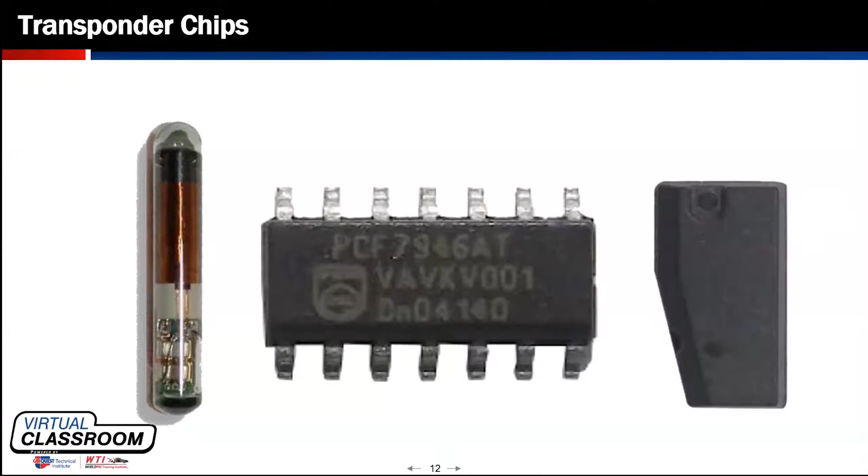So the parts of this transponder are important just in understanding how it works so we can diagnose when there's a problem later. There's an IC board on there that actually does the functions, actually will communicate. It has information that's being transferred from one side to the other. It's not just a single little chip. It's actually quite a bit of information going on there. There's an antenna that has 2 purposes, and that antenna core is integral to the antenna actually working.

So the antenna acts as a receiving device to receive a magnetic field, an actual electrical induction to charge up the IC board, because there's no battery inside of this. So when the antenna ring, which we'll talk about in a minute, actually powers that antenna coil up, it receives enough energy to actually do what it's supposed to do, whether it be yell out a serial number or communicate back and forth more than one time. There may be quite a few functions happening between the key and the antenna ring.

Well, that's all powered by the antenna coil, and then that information is pushed back out of that coil. So it both acts as a receiver to receive the energy to energize the transponder, and the antenna to boost that signal out so the receiving party, which is the antenna ring, can listen in on that. So let's talk about that part next, the antenna ring.

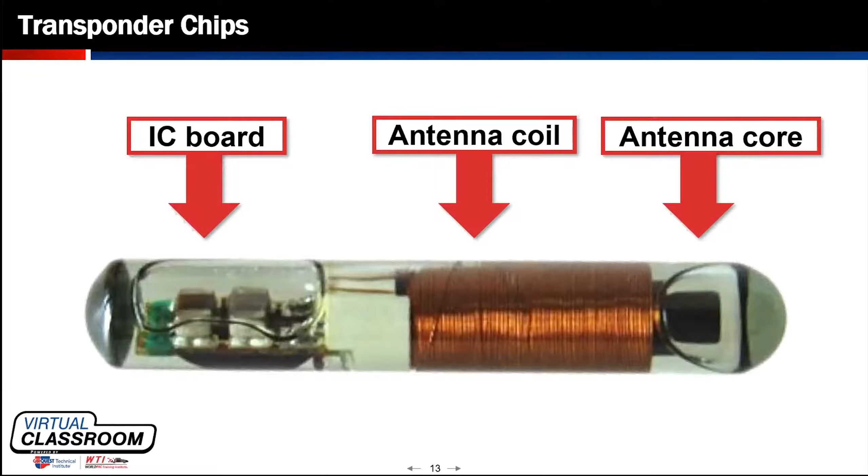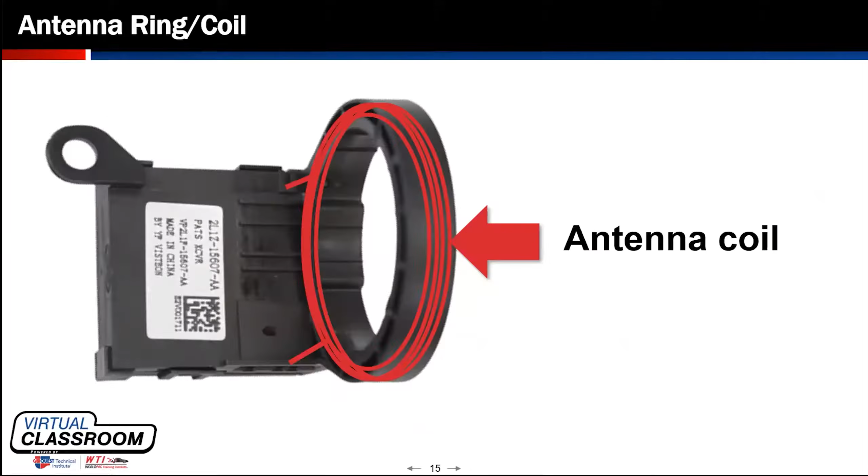There's another antenna coil there, and there's a circuit board. And that's the essentials of almost all of those antenna rings. So this IC board will act as the controller that communicates with the theft modules on the vehicle and communicates data. Sometimes it'll communicate just a, yeah, you're good to go.

Sometimes it'll send all of the key data for another module to make that decision. There's all kinds of functions that can happen in there, but essentially that IC board powers that antenna ring to send out that secondary voltage, similar to an ignition coil, to actually power that transponder that's inside the key. And then at the same time, it starts to listen in for what comes back. So all that happens very quickly.

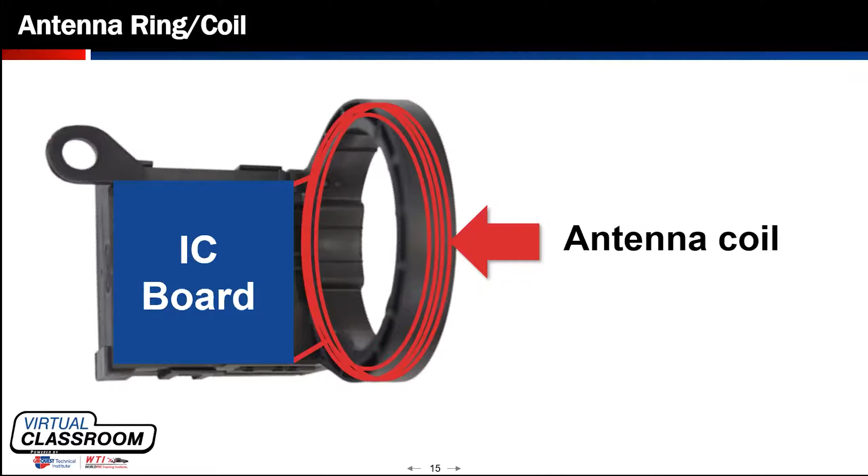I'm going to spend just a second on this one here because we're not really going to talk about this system at all for the rest of the class. It's pretty antiquated and not in a lot of vehicles anymore. I'm in the South, so we still do have quite a few of these vehicles running around. I do run into them often, but across the country, it's less likely you'll see this system at all.

So this key actually has a resistor inside of it, which is not at all like the transponder chips that we just talked about. This is a literal resistor. When the key's inserted into the lock cylinder, that resistance will be read by a separate module in the vehicle called the VTD module, and it's reading that through a pair of wires that's physically connected to the lock cylinder that's physically touching the two ends of the resistor.

As long as that resistance is the correct resistance that's programmed to the VTD module, the VTD module will send either a 30 or a 60 hertz square wave signal to the PCM. 30 hertz signal is usually on the LT1 V8 cars, and then almost every other car uses a 60 hertz square wave signal. And it's transmitted over just a single wire to the PCM. When the PCM receives that signal, that's the okay for the theft release. So that's when you'll get your injector pulse and control and everything else.

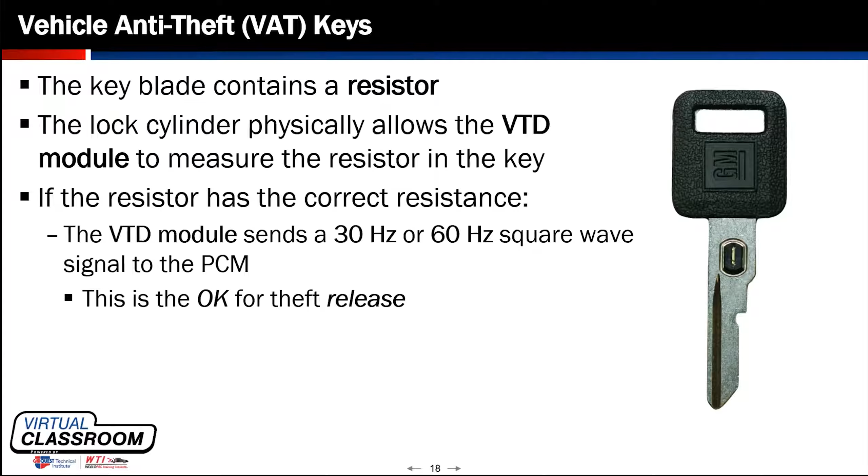And so it's a pretty simple system, but you can see how a few different locations could cause a breakdown. And that's about all we're going to talk about the VATS system, because it is uniquely different than all the rest of these transponder systems. So then onto our standard transponder chip, which again, this type of key just houses one of these transponders. It could house any one of the two non-circuit board style ones that you'll find. I have not found this regular, plastic head, no button key that has a circuit board in it. All of them have just one of these two transponders we talked about.

And again, that transponder doesn't house a battery. So the plastic of these keys is important. And you'll find that some of the inferior aftermarket keys that you can add chips to, I've run into a couple issues with some of the cheaper ones where they actually will not allow the transponder to communicate through the plastic because the plastic has some kind of different chemical makeup in it. So if you're getting into this and starting to buy keys with a spot to put a transponder chip, make sure you buy some kind of name brand key.

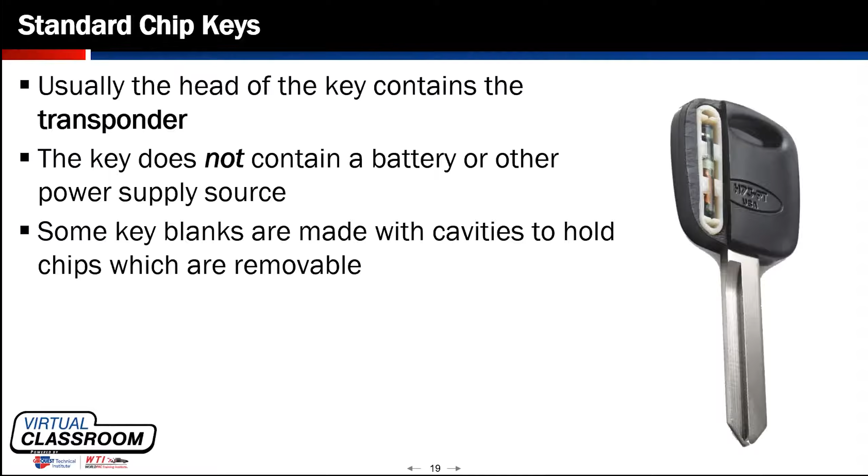The more common that we see now is a fob style or a finger operated button integrated key system. This has a transponder chip at the top that's actually soldered to the circuit board. And then the remainder of the key is actually the circuit board for the fob or the remote entry functions. Now, those are usually, and I say usually, because under most circumstances I can think of, programmed together. So once you program the transponder, the remote becomes programmed at the same time. But that is not always the case. It's just usual.

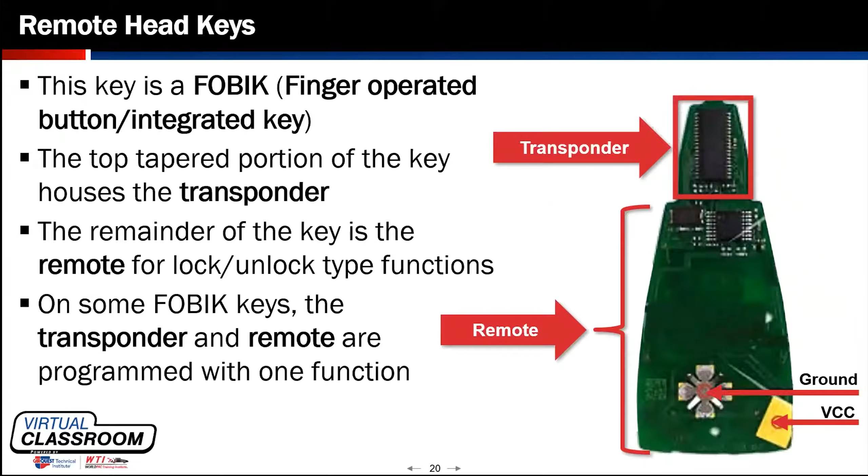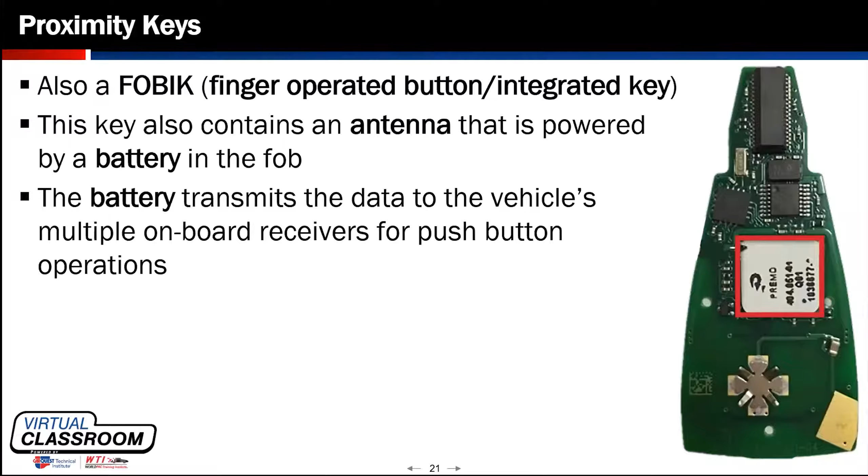So let's talk about some of those systems, or let's talk about what we're going to call our standard immobilizer system throughout the rest of the class. When I reference something as our standard immobilizer system, this is what we're going to be talking about.

Talking about a... Can I throw a question out to you just real quick? Please. Security systems in general were somewhat complex before, but lately they've become extremely complex. Is there a year break that you can identify that these systems have integrated more features to make them more secure? Not a solid number, but around 2011 and up, they start to really get integrated into many more modules. By 13, nearly everything involved 2-3 modules or more.

And then some of the systems kept pretty simple. Like this standard one we're going to talk about, all three of the major manufacturers of the domestic variety anyway still use this system on a lot of vehicles, but it's usually a work vehicle, a cargo van, a work truck, something like that. Not many of their flagship vehicles.

Like even something as inexpensive as a Chevrolet Cruze, one of the lowest cost vehicles you can purchase from GM, has a push button start system now. When it's a 18, 19, or 20, they all have it. So once you get to a push button start system, the amount of modules involved doubles or triples. Okay, thanks for that perspective, Keith.

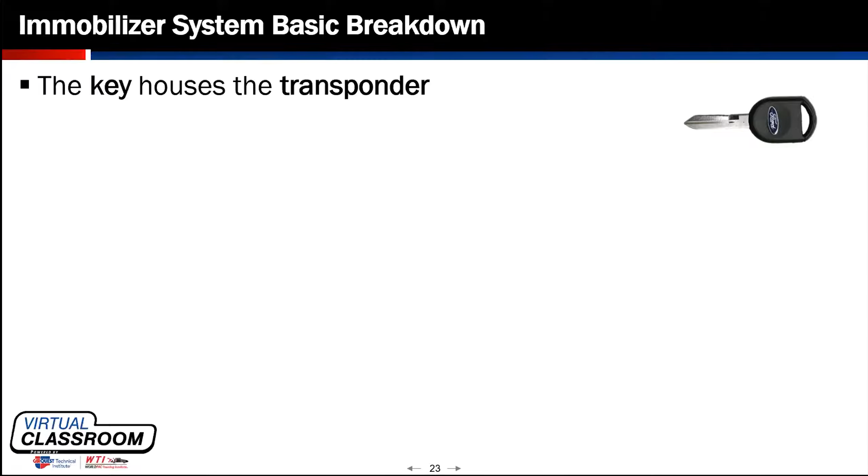Yeah, absolutely. So we start our system with just a key. The key houses a transponder that communicates with the antenna ring. And that antenna ring listens for the transponder ID and transmits it to a module. That module then takes that information and transmits it to the engine control module. Engine control module usually will challenge that response, and if the two calculations are correct for each other, then it'll release the immobilizer system and allow it to start.

So we're going to call that our standard immobilizer system. So when we deviate from that, we're going to kind of break apart and talk about the differences in the systems that are like this, and then some of the diagnosis of this system.

So we'll start with Ford, since we've kind of already led into talking a lot about Ford. And I use Ford as one of the examples I use the most to teach on, because there's so much service information about them. It makes it a little simpler to learn. And then once you've got the basics down of how all this works, it becomes a lot easier to integrate other vehicle systems in there, because under most circumstances, Ford, GM, and Chrysler usually didn't invent the immobilizer system, but they integrated some other companies' different systems together into theirs. So a lot of the techniques used on how they operate are shared amongst most of the manufacturers.

So I like to break Ford down into 3 basic systems. PATS, passive anti-theft, it's a name that Ford uses, 1, 2, and 3. These are very approximate year breaks. So please just be aware they have a lot to do with the different model. You can have a Ford truck that has the same immobilizer system in 2020 as it did in 2004. Just kind of depends what trim level you've got and what exact vehicle. But PATS 1s were predominantly available from 95 to 99.

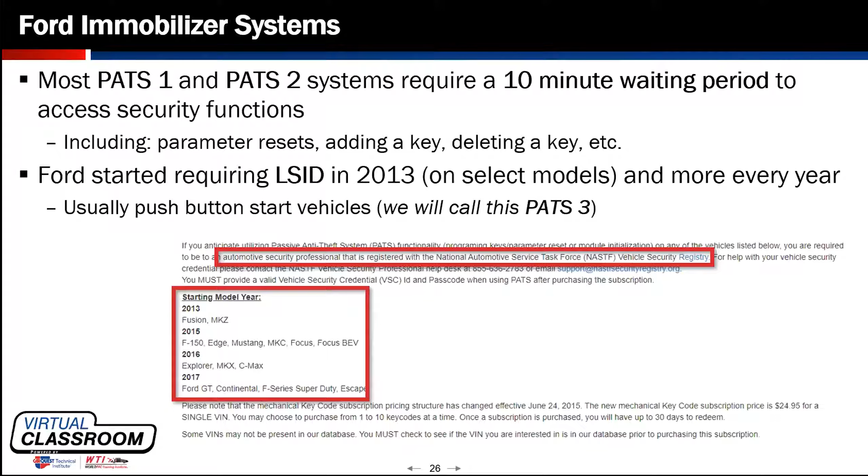And within those designs, there are different architectures. Like in the PATS 2 system, you can have one that the PATS module communicates directly with the PCM, or you could have one that the PATS module communicates with the cluster, then it talks to the PCM. So there are a couple different designs. You just really need to read the service information.

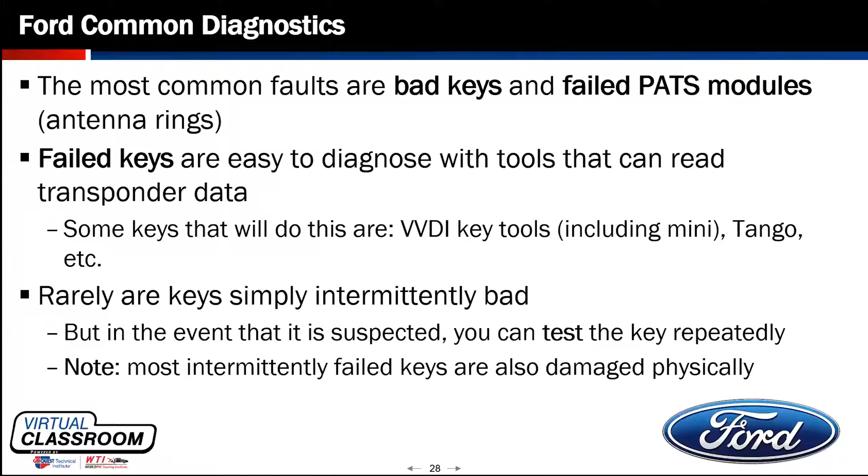And then if you do find an intermittently bad key, it's usually because it's physically damaged. My experience has yielded that as the most common result. So if we're going to test an antenna ring on a Ford specifically, they're a really simple design. They usually have some kind of battery positive. I wrote here constant, but I think most of them are switched, honestly. They do have a constant ground. Then there's a TX and RX communication circuit to some other module.

The Ford PATS 1 and 2 systems are broken into two types, a 40-bit and an 80-bit. They now have a 128-bit immobilizer system as well that's derived from a European system, but it operates on very similar principles. This is different than the key bitting. The 40, 80, and 128-bit is the encryption type, so it's the type of chip that it uses. But the type of chip between 40 and 80-bit changes the communication structure for the PATS module.

So on the 40-bit module, there's a B plus to the PCM on the TX line that is provided by the PATS module. The PCM, when the key is signaled on, will actually pull that 12-volt signal to ground, and that commands the PATS module to power up the transponder and read the data off the key. When it does that, the PATS module will receive the data, and then it'll pull the 12-volt signal down on the RX line. Now, the RX line is actually receiving 12 volts from the PCM.

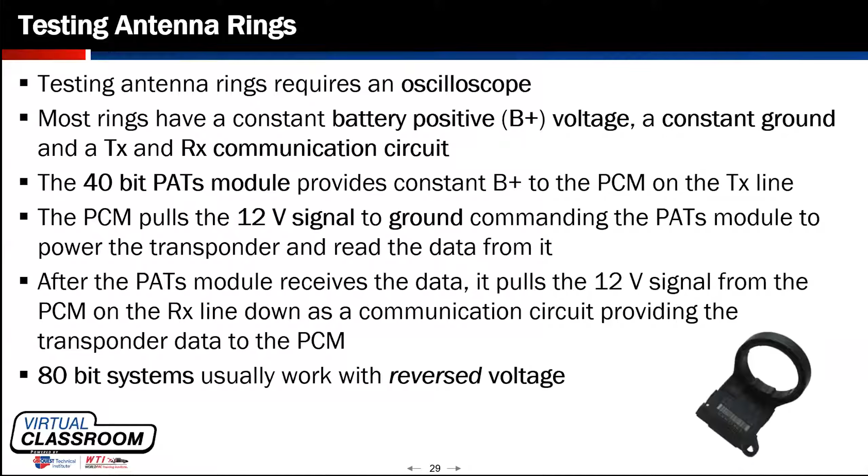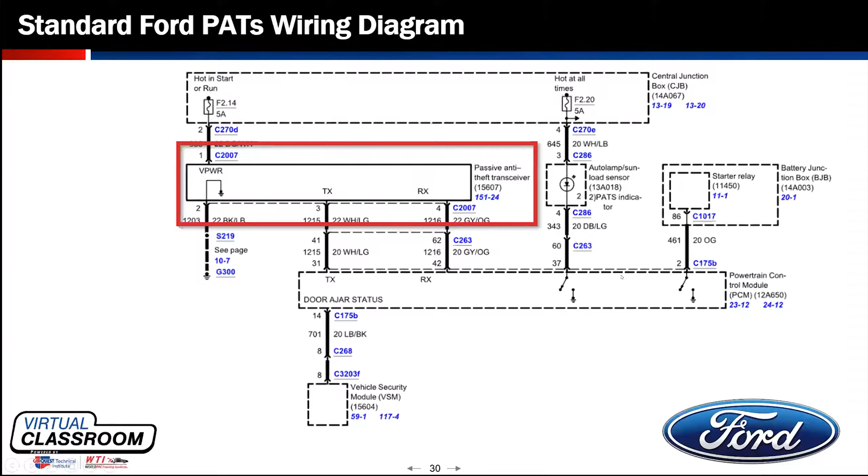That's really it. So we're going to move to General Motors systems next. Again, that's not all of Ford systems, but we're going to use different manufacturers to kind of elaborate on some of the different systems that are out there. Okay.

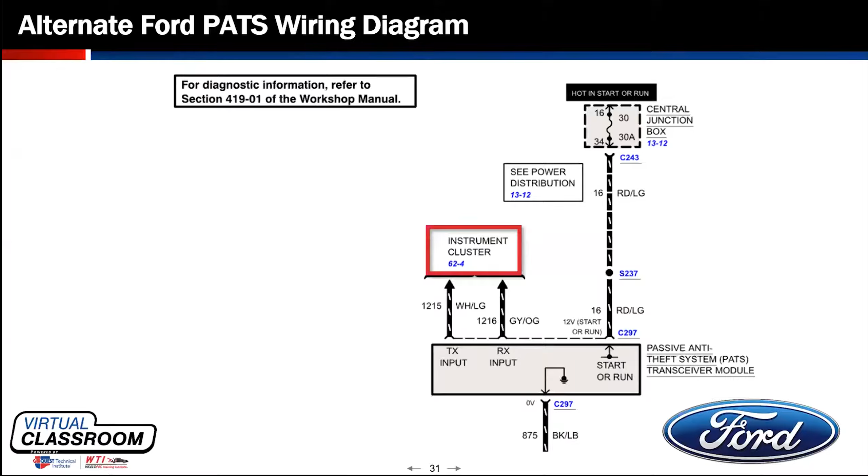So with General Motors, we talked about before the VATS system. The Pass Key 1 and 2 were the old system with the resistor key that operated somewhere between '86 to '05. The Passlock system, which had 2 generations, Passlock 1 and Passlock 2, operated in '95 to 2009. The difference of those 2 systems is where the actual Passlock sensor came from. The Passlock sensor was either in the key or in the lock cylinder housing assembly. Then the Pass Key 3 system, which operated about '05 up to present, is our pretty standard immobilizer system.

Now, Passlock 1 and 2 and the Pass Key 3 system are both considered our standard immobilizer system, but the principles of operation and modules required were completely different. They used a totally different architecture. Passlock 1 and 2 had its own separate module that was specifically only for the immobilizer system. And the Pass Key 3 usually has the data being read directly to the body control, and then from that point communicating with the engine control. So like our drawn out image that we showed earlier.

Now that's kind of all we're really going to cover on GM. There's not much difference in those. Again, just relying on your service data for diagrams, but the components have very similar design. Testing is very similar. You just got to read what each one is designed to do in order to diagnose them. But we'll use GM to introduce push button start systems. GM's particular system is called PEPS, or passive entry, passive start. It was introduced in about the 2010s; I believe one of the first models was like the Camaros and the Cadillac SRX. And again, those dates are super approximate because it really depends upon the model.

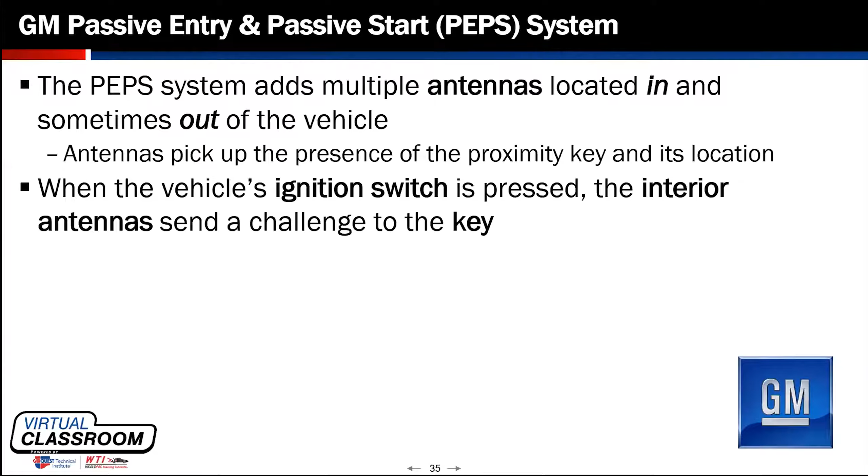So like we talked about, there's a bunch of antennas in and outside the vehicle to detect its location, so keep that in mind. So when the ignition switch is pressed, the interior antenna sends a challenge to the key. The key receives the challenge and sends its response as a radio frequency message to the remote control door lock receiver. Then the BCM gets the message through the remote control door lock receiver.

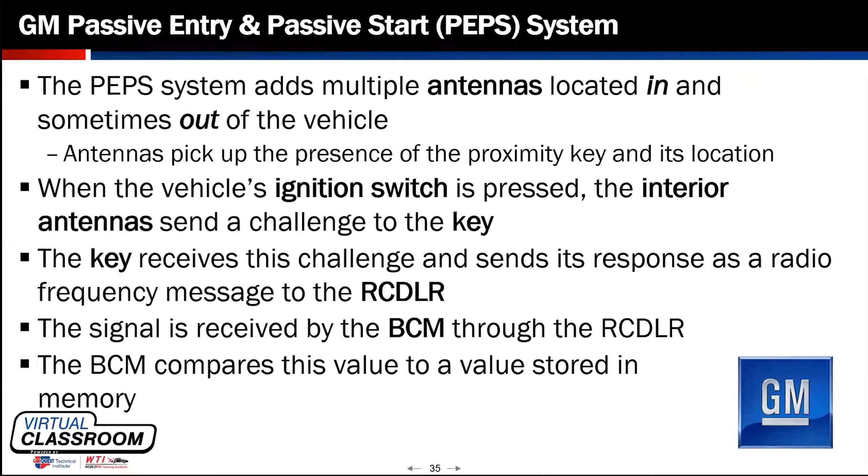So we've already gone from ignition switch being pressed, keys are talking to the antennas, the messages are sent to the remote control door lock. The remote control door lock turns around and sends it to the BCM. The BCM compares that value to what it has in its memory. And then the car just starts, right? Oh no, we're not even halfway through.

The BCM monitors various control modules to determine if the stored environmental identifiers match. Multiple modules in late model GMs have what's called an environmental identifier stored in them from the very first time they're programmed to a vehicle new, and that environmental identifier is synonymous with the one vehicle. And even during a programming event, that identifier does not change.

So that is why you'll find a lot of warnings about not using used modules from other vehicles in late model GMs. And that's because you can easily set a theft event by using a used HVAC module or SRS module or instrument cluster, because those are all modules that will house an environmental identifier.

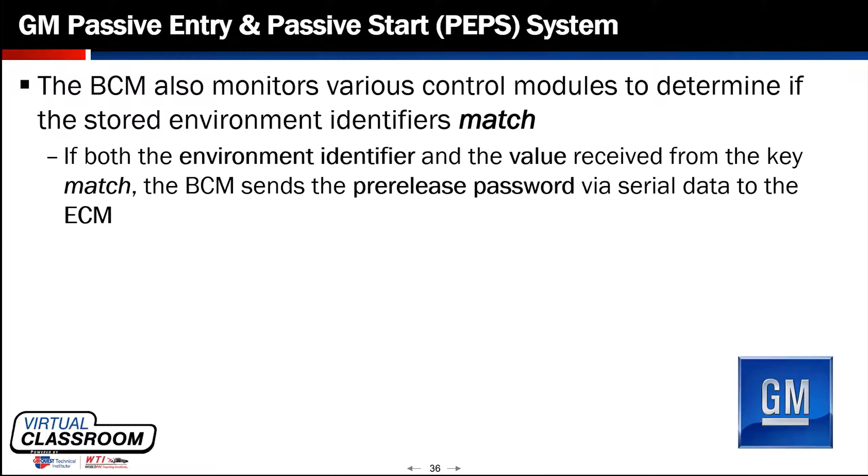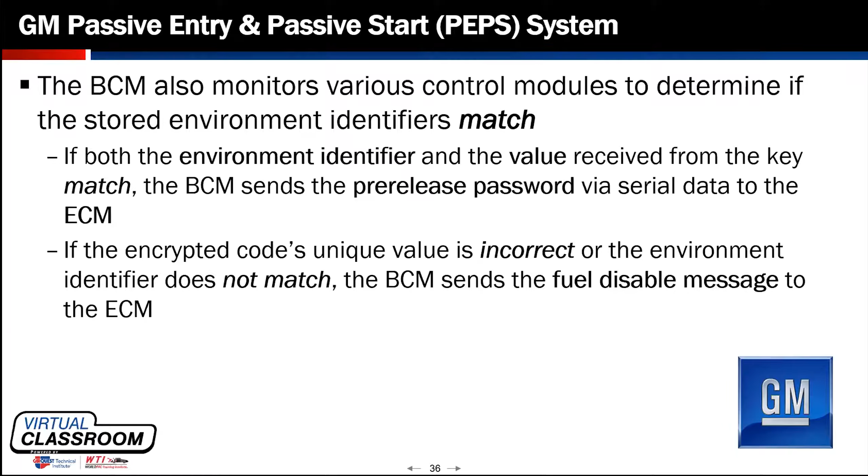Now, if both the environmental identifier and the value received from the key match, the BCM sends a pre-release password over serial data to the ECM. If they're incorrect, the BCM disables fuel immediately. So the ECM has received a pre-release password from the BCM, and it challenges that password. So that challenge is sent back to the BCM over the serial data.

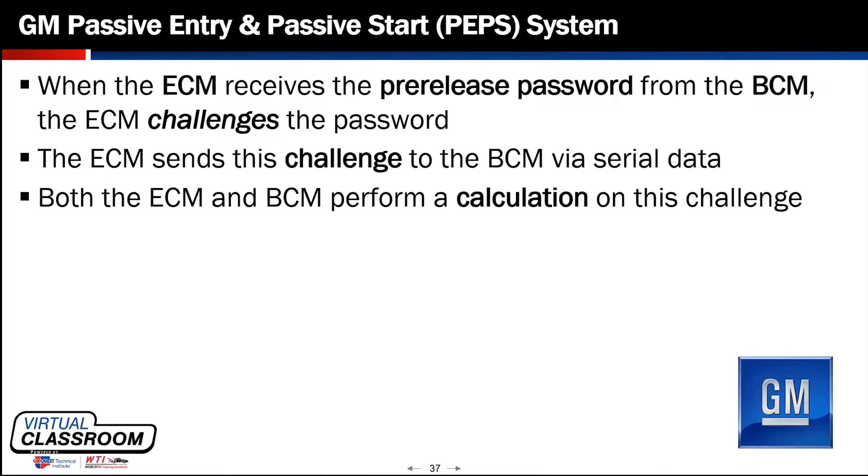Now the ECM and the BCM both have received a challenge from each other, so they're going to perform a calculation on that challenge. If the calculation is correct between both of them, it allows it to start. So that's a lot of modules. So what do we have here?

We have the low frequency antennas, the key, the remote control door lock receiver, the body control module, the engine control module, and every other module that has an environmental identifier, which to my knowledge are engine control, body control, instrument panel cluster, HVAC, and the SRS module. Those are the 5 that I know almost every Global A car, or the late model architecture, without going too far into that, has an environmental identifier. So that's 6-7 modules that are required to start this car.

Everyone think it's going to be really easy to figure that out? Would that be a lot of testing? This is where you would heavily rely upon scan data and your scan tool. So maybe it'd be a good time to step away from your scope for 5 minutes. I'm a scope guy, don't get me wrong. I like scoping all the things, but you also really have to pay attention to your scan data and reading codes and looking at each module's live data and seeing what's going on.

Seeing the codes in these things. There's data PIDs for each one of these modules showing if it's received its correct data. So you can really follow this chain of command all the way through your scan data to determine what's at fault.

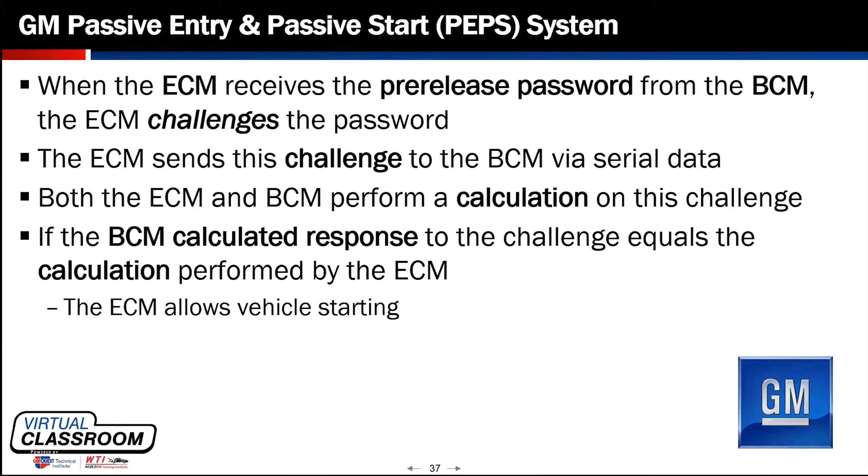Now, when we talk about adding keys to this system, how do we program keys? Well, Ford had the 10-minute wait, and then they had where you have to use the LSID that we talked about earlier, and we're going to cover that some more later.

GM's is really, really different. Usually when you're just adding a key to a system, like you already have an operating key and you'd like to add another one, there are almost no tools required. On systems that have a lock cylinder, the procedure is usually insert the key, turn it to the on position, don't start the car, wait for the immobilizer light to go out, or within 5 seconds usually. Take that key out, take your unprogrammed key, cycle it on, and after 3 to 5 seconds, that key has been added. And that's really about it.

On the push-button start cars, it's very similar. It's different locations for each one of them, but you'll usually place your working key in a location, turn the car on with the push button, turn it off after a few seconds, and then replace the programmed with an unprogrammed one and do the same thing. Usually the push button start cars require 2 working keys to add a third one, but again, it's all dependent upon the make and the model specifically.

Now, an AKL or all keys lost situation, that usually requires you to perform a programming event, like with a J2534 device and a subscription to SPS on GM's website, just like you're going to replace a module. You'll go in and you'll select Immobilizer learn, and you'll select if you're adding a key or what the situation is. And that takes about 10 minutes. So that is a 10 to 12 minute countdown after you've initiated that programming event. And then you'll be able to add that.

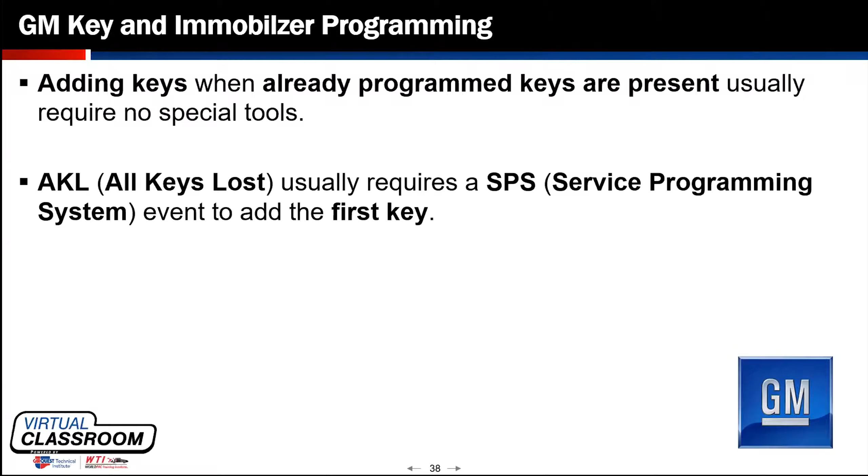So that's a manual option. Again, it's not available for every single car, but if you read your service information, you may find that that is available. Now, also things like when you replace BCM, PCM, or other theft-related modules, there are immobilizer functions that have to be done. So that's another SPS event, a programming event. And not every time will the 30-minute manual situation work for a replacement module. And sometimes it has unintended consequences.

I've run into on some GMs, particularly an SSR, I remember, that a BCM was replaced and it was failing to perform the SPS programming through the SPS system. So the customer attempted to do the manual and it would start, but it left an airbag code because the SPS event hadn't been performed correctly. So the airbag initialization was part of this body control system. And because it hadn't been through the immobilizer system correctly, it also wouldn't learn the airbag SDM primary key.

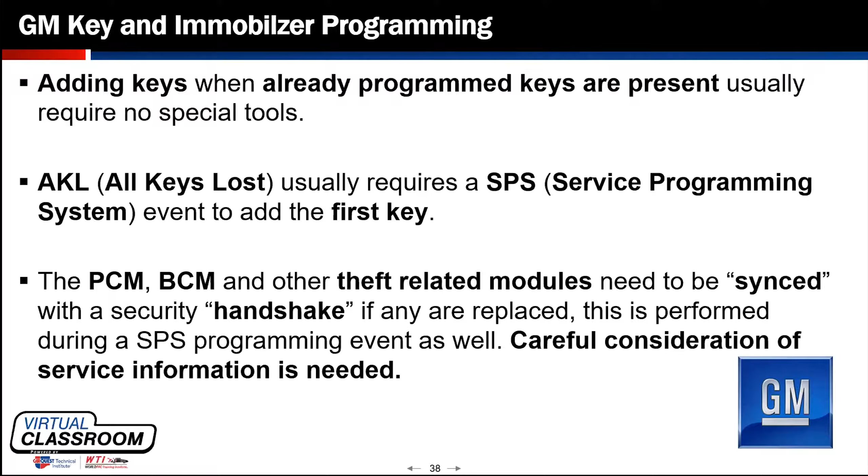So without going too far into module programming, it can get convoluted. You need to make sure you follow service information. Service information outlined in this one that the 30-minute manual was not advised. So let's talk about some Chrysler systems, unless there's any GM stuff we need to cover.

Quiet group here tonight. Oh yeah, getting all the questions for me then. Get them all ready.

So the Chrysler systems. There are 4 main Chrysler systems is how I'll break them down. The Sentry Key Immobilizer System, or SKIM, operated from 98 to 2006 era. The SKREEM system, Sentry Key Remote Entry Module system, which is really just the same as the SKIM, but they add the remote entry or the remote keyless entry functions to the same one module. So the SKIM system had the transponder unit by itself, and then a separate module or part of the body module for doing like keyless entry functions. And then the SKREEM system added those 2 together, so put them all into one module. And that operated from about 04 to 2014-ish.

Service information still calls that SKREEM module a WCM, a wireless control module. Now, the wireless ignition node system, the 2008 to present, is the most common we find. That's the one with that fobik key that just goes in the dash but doesn't have a metal key. I'm sure you guys are all familiar with that Chrysler style key. That was technically called a wireless ignition node, the unit that key goes into, but it's also referenced as a wireless control module in service information. So it gets really convoluted when you find that between 04 to 2008 and 9, some of these SKREEM systems, they still called them the same as the later ones.

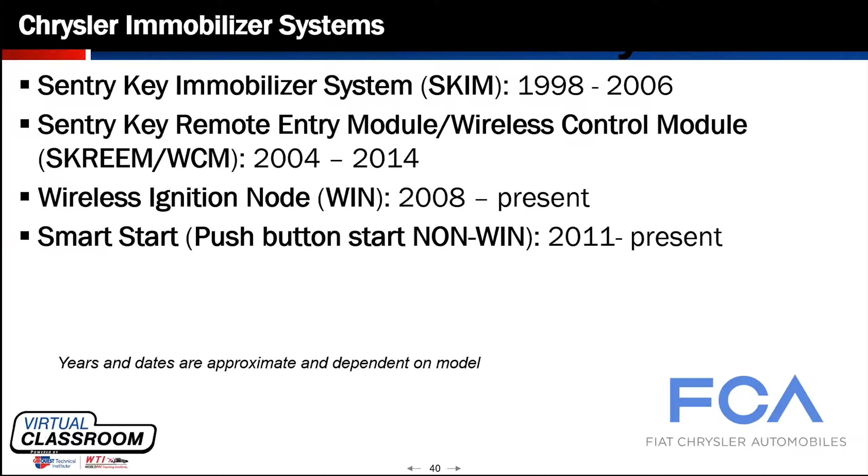Here's kind of some images of what the SKIM, SKREEM, and WIN modules look like. Again, the WIN module there on the far right is the one most commonly found in Chryslers that I work on, at least. I don't work on so many SKIM and SKREEM cars anymore. The SKREEM cars that are up to 2013 and 14 are really hard to find, usually not a U.S. market car.

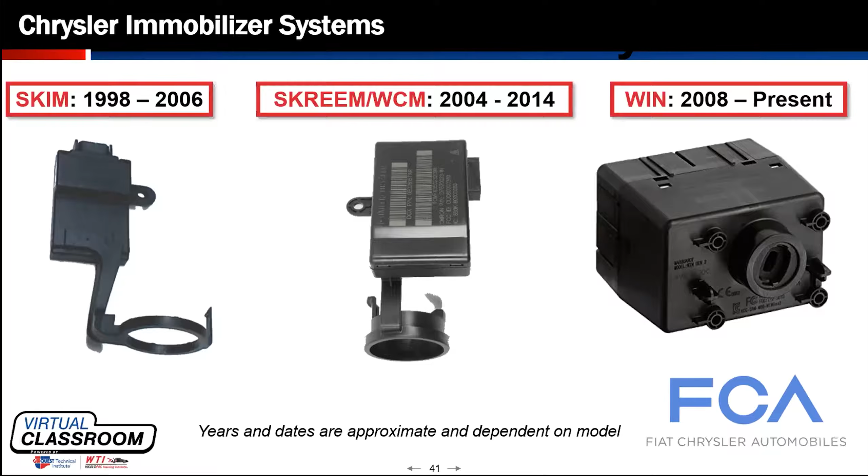So how they're wired gives us a lot of information. On the SKIM cars, there were 4 wires on that SKIM module. Very simple. Had a constant power, a constant ground, a fused power, and then a single PCI bus communication line. So real easy to determine if it was communicating or working.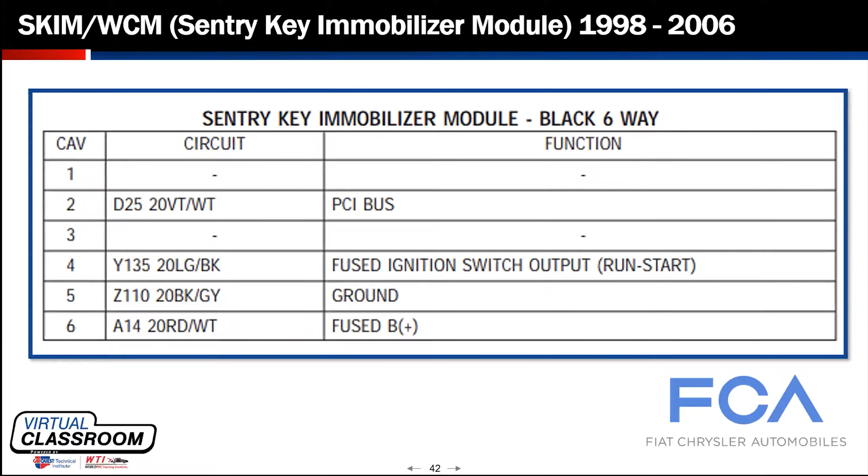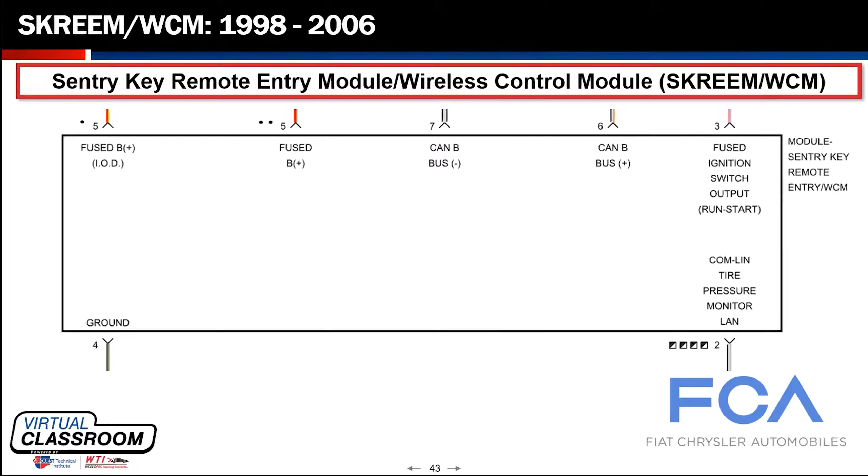But we have, in essence, a constant power, an ignition power, a LIN wire for a TPMS, a constant ground, and CAN wires. That's it. It was a pretty simple design when it comes to determining if it's good or bad and communicating.

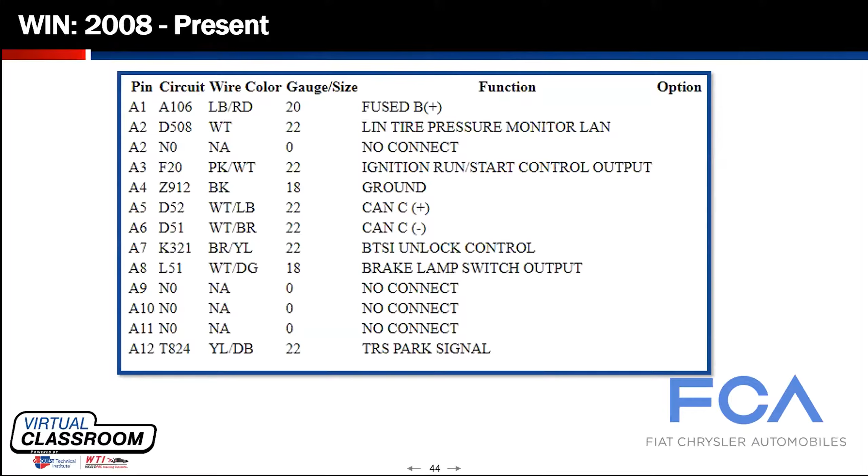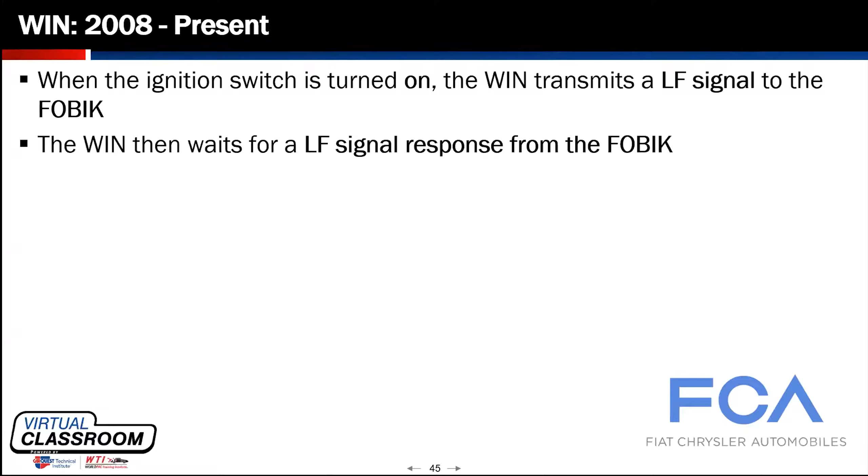So how does that WIN module system work? Because that's the system we're going to run into the most, and it's a little different than the others. So when the key is turned on, the WIN module transmits a low frequency signal to the key, the fobik. The WIN module then waits for the low frequency signal response from the fobik key. And then if it's valid, the WIN module will send the valid message to the PCM over the CAN bus. So it makes all the determinations inside the WIN module, and it just tells the engine module, hey, we're good to go. And then the PCM will enable or disable engine operation based on that status message that it receives.

So an interesting thing is the default condition for the PCM is invalid key. So if the message doesn't come back from the WIN module, it'll die after 2 seconds of running, which also tells us that if we're ever having an immobilizer concern and it's a crank no start, then it's not really an immobilizer concern because the PCM is prompted to start and run for 2 seconds. And once 2 seconds of being in an invalid key situation, then it shuts off. So if you've got a crank no start or a no crank condition and you believe it to be like an invalid key problem or an unprogrammed key or something, you can bet it's probably not.

So all of that information was found in service info. And with that little bit of reading, we've actually helped narrow down so many of our crank no start conditions to being not an immobilizer concern if it doesn't start.

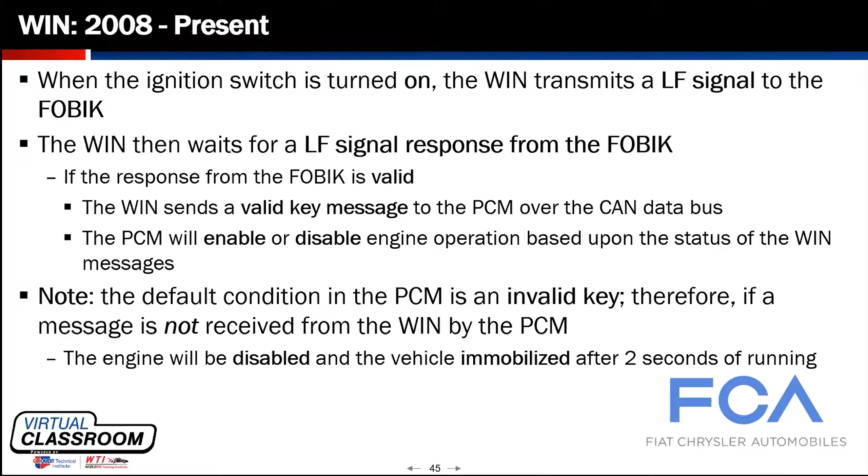Now the push button start vehicles, the keyless go system that still have a WIN module, those, with the exception of the push button part, operate all the same on the back end. So what's different about them is that there's a separate passive entry module. And that passive entry module is wired to a couple antennas that are listening for the key being in the vehicle. It's also wired to some door switches and liftgate latches and such. But really, that passive entry module is looking for when the push button happens,

the WIN module communicates to the passive entry module and says, hey, do we have a good key? And through those CAN lines, it says, yeah, you're good to go. I see the key. And this is the key numbers. And then everything else from that point forward is the same as if we'd had the key in the dash and turned it.

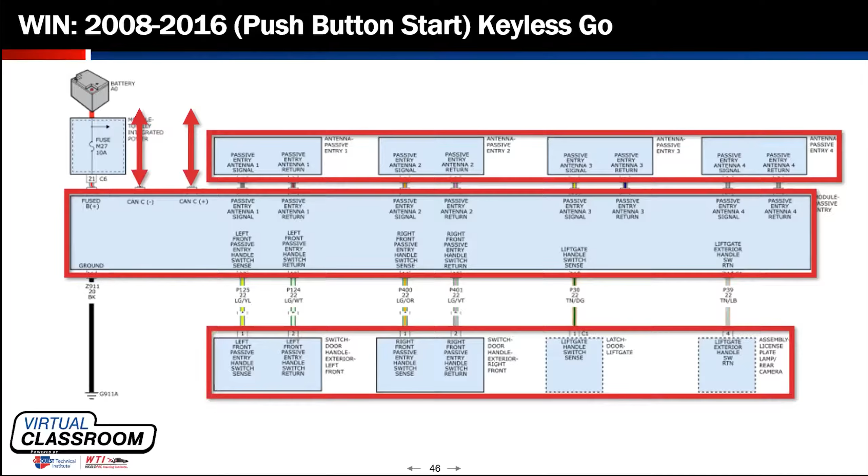The smart start systems, which do not have a WIN module, incorporate a radio frequency hub. There are a lot more parts in the system. So there's the key, and then the KIN, the keyless ignition node, which is just the push button itself. Radio frequency hub, which to the right has a ton of antennas attached to it as well. You can see in the diagram.

The powertrain control module, and then the cluster and the TCM and electronic steering module and the body control and all those other inputs, they all matter. They're all part of the system. This one diagram is the starting system circuit diagram. So you can see it has a little bit to do with everything.

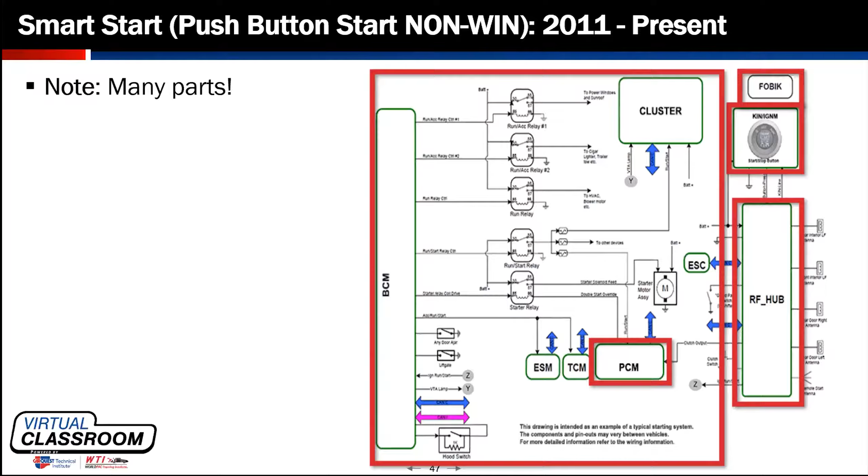So on that system, when you press the KIN button, it sends a request to the radio frequency hub over its own little LIN bus. From that point, the radio frequency hub will request that the keyless ignition node looks for a valid key over low frequency antennas. So the RFH hub detects a valid key; if the brake is engaged, then it sends a CAN request to the BCM and changes the ignition position to start crank. So this is where all this cross module communication happens. And then the BCM sends the command to turn the vehicle to crank.

So if conditions are correct to start, the PCM turns on the high side of the starter relay first. So both control sides of the starter relay, the high and the low side, should be pins 85 and 86 of a starter relay. So the high side is powered by the PCM and turns the crank hold signal to true inside the scan data. You'll be able to see that.

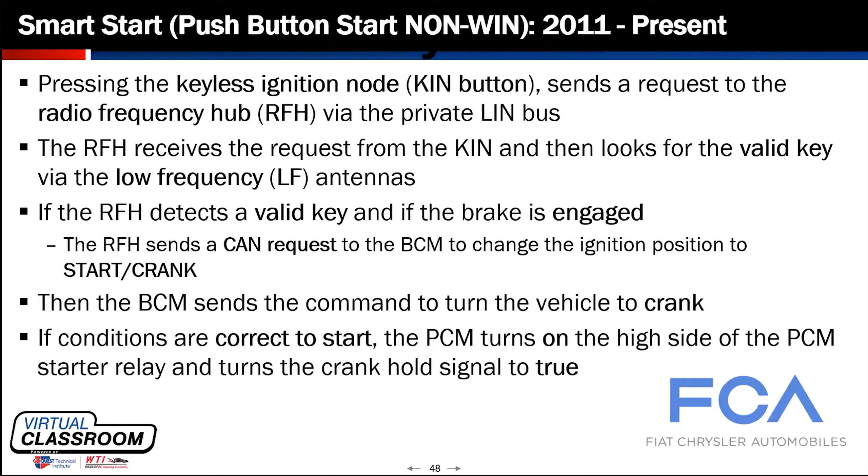At that point, the RFH hub changes the ignition position to run if the start type is a tip start, the 5-second time expires, or the engine controller indicates the vehicle is not in park or neutral. So once it's determined it's gone past the 5 seconds, it goes to the run position in scan data, and you'll be able to see that.

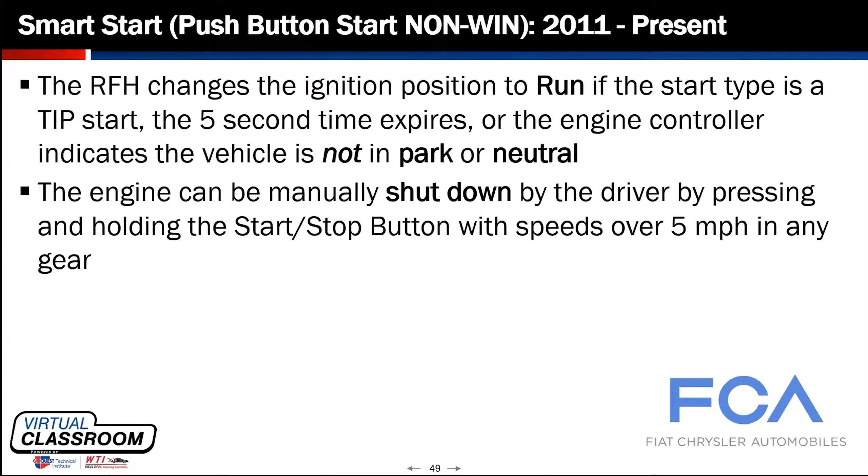Now, the engine can manually be shut down by the driver by pressing and holding the start-stop button at speeds over 5 miles per hour in any gear. So if you have a concern where you need to shut the engine down and just simply pressing the button isn't going to do it because you're not in park, right? You can't unless you're in park or neutral. You can press and hold the button, and it should shut the car off.

But if the BCM is still in crank position and the crank hold is true, the BCM turns on the low side of the starter relay and the engine will start cranking. So again, the high and the low side of the relay are controlled. Neither one of those is a constant power or constant ground. So when you're doing your standard checks and pulling a starter relay and starting to pin probe things out, if you haven't looked at a wiring diagram yet, you shouldn't be checking for anything. You should build your test plan first. A lot of this should start with looking at scan data.

Hey, Keith. Yeah. We have a question from Chip. Is the 2-second run and stall only applicable to Chrysler, or can we use that across most other makes and models? That is usually applicable only to Chrysler WIN module systems. The SKIM and SKREEM systems were a little bit mixed because there are many of those that crank, don't start. But if it's got a WIN module, if it's got a black plastic key that goes in the dash on a Chrysler, you should get a 2-second start and stall if it's a theft problem. He says, thank you. Perfect.

Yeah, no problem. I'm super hesitant to ever tell any of you guys that this works for every car. There's always one out there. Just short of that, most of the tires take air is the best thing I can give you for across the board. I don't even know if you can say that anymore. Yeah, somebody will come up with something. Most of the tires take air. Most.

And then the engine will start and the PCM deactivates the double start override. And then the BCM will deactivate the starter if the engine starts or maximum 10 seconds has been reached for the tip start. So that's one of those where you press the button and it goes, and it's not starting. It's 10 seconds. That's a long time on a starter, if you ask me.

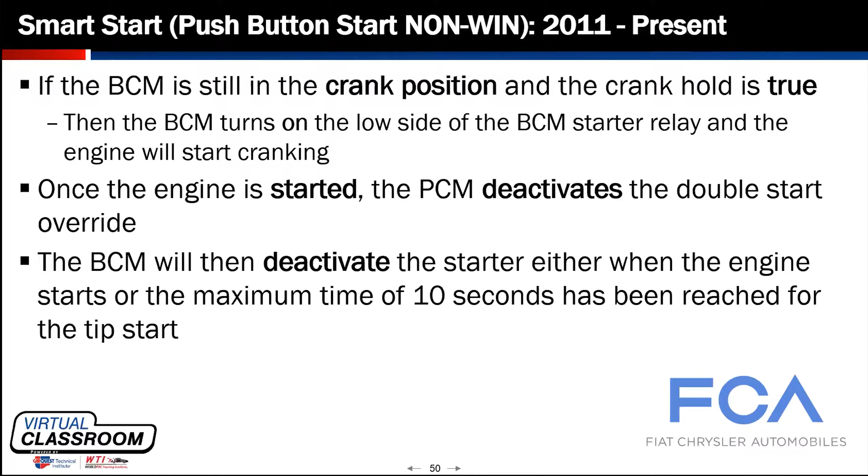Now on programming Chryslers, and when I say programming, I guess registering, teaching keys, doing immobilizer functions on Chryslers, this is one of the manufacturers that uses PIN codes. So these PIN numbers are stored in the EEPROM of the SKIM, the SKREEM, the WCM, or the WIN module. Now, unlike the keyless go systems, they can be stored in multiple modules. So if it's a WIN module car that's a push button start, that PIN number is stored in the passive entry module and in the WIN module, and they have to match.

So a lot of the guys have found that if you replace a WIN module, when you click in your scan tool, replace WIN module, it'll ask you for a PIN number. And whatever PIN number you type in there now becomes the new PIN number. Ooh, fun trick everyone just learned, right? Do that on a keyless go system and put the PIN number in wrong. You get to go buy another WIN module and then still purchase the PIN number to find out what it is, and then make sure it's the same as the passive entry. Otherwise, the push button start function will never work. So that's a very upset customer.

Hey, Keith, there used to be a lot, and still are some websites out there that advertise that they'll sell you a PIN number. Can you comment on that and why it might be a bad idea? A lot of those are shut down. And then you got to think that you're circumventing a system put in place that works in cooperation with law enforcement. So I would venture to guess that purchasing a PIN number and using it on a car when you're not authorized to could have some legal ramifications. I don't know what they would be. I'm not saying it's ever happened.

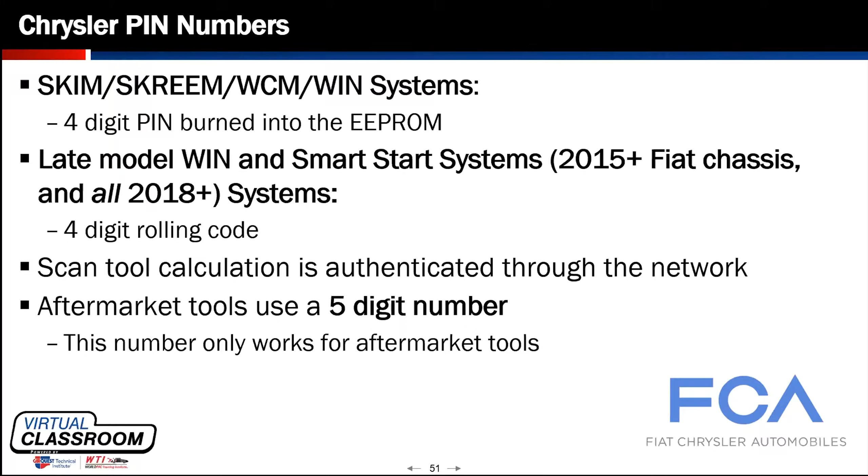So where do we get these PIN codes that we're talking about? These elusive codes that are so scary, right? The only legitimate source to get them is through NASTF. To get a locksmith identification number to become VSP, a vehicle security professional, there are a couple things outlined on NASTF's website. It is different depending upon where you live.

But for the most part, the overall requirements are to have a certain level of insurance, they have to pass a background check, then there's a fee associated with it, and then a wait time. And then there is a little line in there that says that if your state requires a license for just locksmithing, then you'll have to have that as well.

And that can pose a problem because in the state of Oklahoma where I live, to get a locksmith license, you actually have to work as an apprentice for 2 years under a licensed locksmith manager. So there can be quite a long wait period if you're trying to get your LSID, depending upon where you live. Keith, I have that website up if you want to take a look at it.

I can share that. Please. And there we go. I actually pressed the share button this time.

Yeah. So this is the NASTF website, and like we don't need more acronyms. It's not LSID anymore. It's VSP, or Vehicle Security Professional. The other acronym you're going to see on this is SDRM 2.0, and that's the Secure Data Release Model. This is where you want to go to get more information on how to apply, how to get your VSP number.

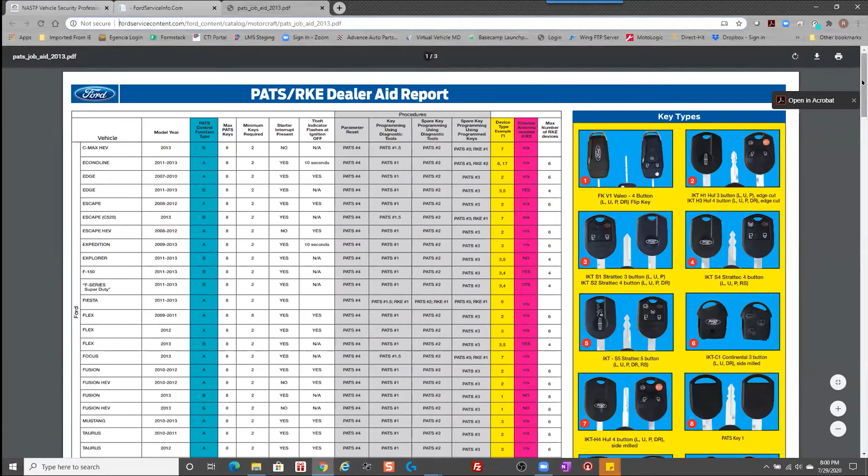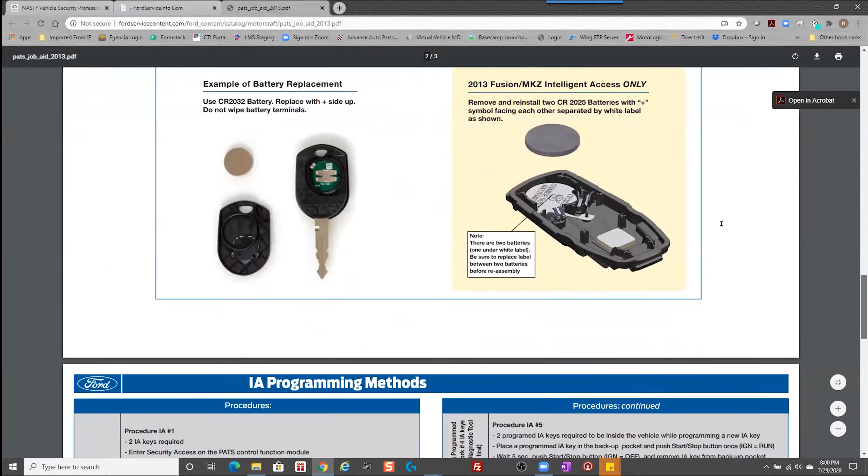As long as I've got the browser up, this is fordservicecontent.com, and this is the PATS Job Aid that Keith alluded to. And there are two of them. The links are in chat. And I'm here to tell you, this will tell you almost everything you need to know to service a PATS system. It's just a phenomenal piece of information from our friends at Ford. Yeah, it's absolutely wonderful they gave us that info. Yeah. Kind of one-stop shopping.

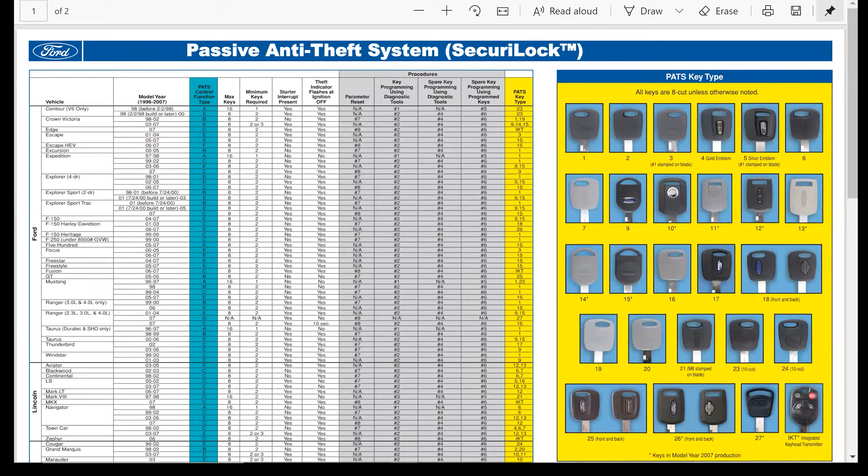I was going to share the Ford PATS thing here, because I had both of them up, the older one and the new one. But yeah, if you guys are going to do a Ford, you should go there first, because there's just a wealth of information. The other thing I wanted to share, where the heck did it go? Sorry, my chat is hiding all this.

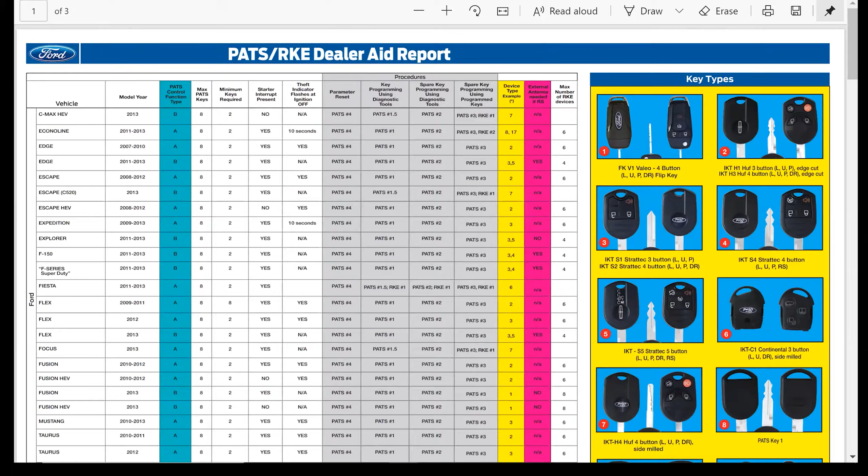I put the link up in chat for that little test coil. Yeah. There it is. Put it around a system that's working. The LED should light up. And if it isn't, then obviously the LED doesn't light up. And it's a whopping $6. So that's an easy thing to find.

And Keith had warned about Global A cars, and I put the link up there on AC Delco. If you go to Diagnostic Scan Tool, you will get a chart of Global A cars. GDS2 supported vehicles are Global A cars. Just be careful with those vehicles. So all that information is available for free to you.

So yeah. The reason we say be careful is those are the vehicles that you want to be careful with putting a used module. Yes. Not only can that module not work, but it can damage other modules too. Yeah. It gets to be a really expensive day. It gets ugly quick. Yeah.

So all those links are in chat. If anybody needs, we can put them up again. But Robert mentioned that he ordered a test coil, and it's back ordered about 2 weeks. So wow. Okay. Thanks, COVID.